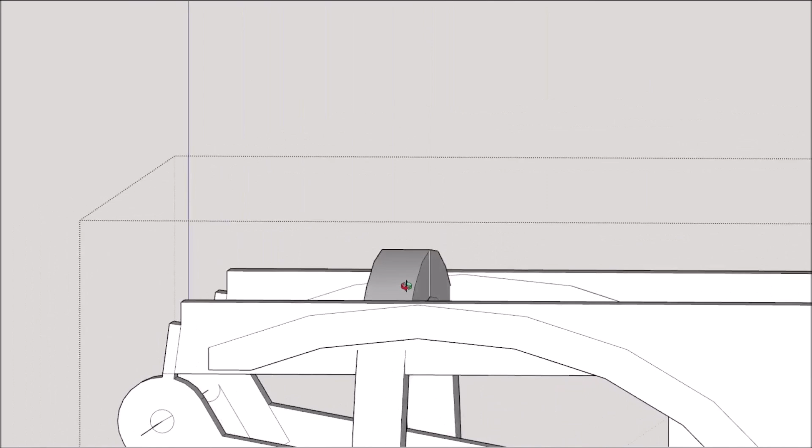Plus, I've been designing, as you see here. I did a screen capture of 5 hours of footage and got it edited down so y'all don't have to see all the studying part of the whole animatronic. But you'll understand that when you start designing your own. Eventually that's what I want y'all to be able to do, because it's just a special feeling when you design your own. It's just a good feeling.

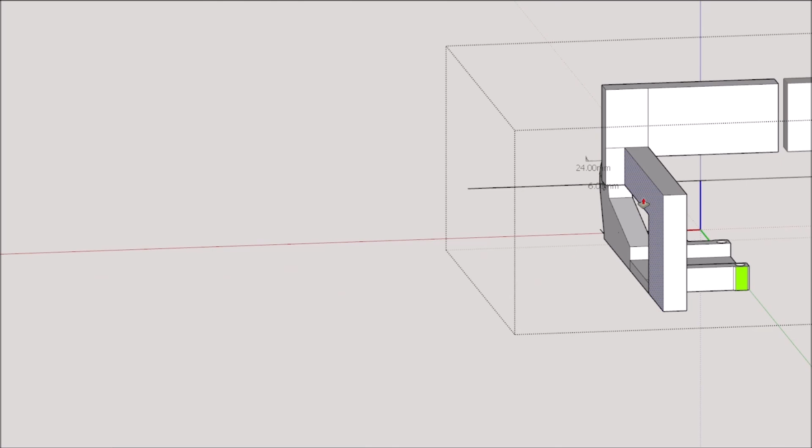What I'm doing here is the designing of the so-called brow mech. There are three servos that are going to be mounted to this so-called scaffold, I'm calling it now, because it kind of looks like it after you see it finished. It really turned out well. I go by the pre-existing shapes I had put these ribs on in the last video we've seen, and I'm going by that as far as height and length.

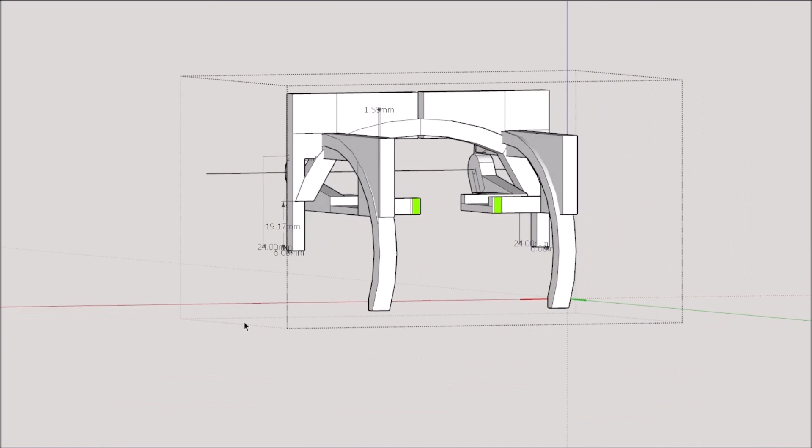I'm kind of doing a block version, not so rounded, because you'll see later I will put magnets for the skull to attach, and it needs to be a flat base. I also have screw points, and I've been making screw points today, but it's coming along. I have it all mixed together here just so I can see what I need to do with these blocks. I'm just trying to attach everything to this eye mech, or the blink mech part.

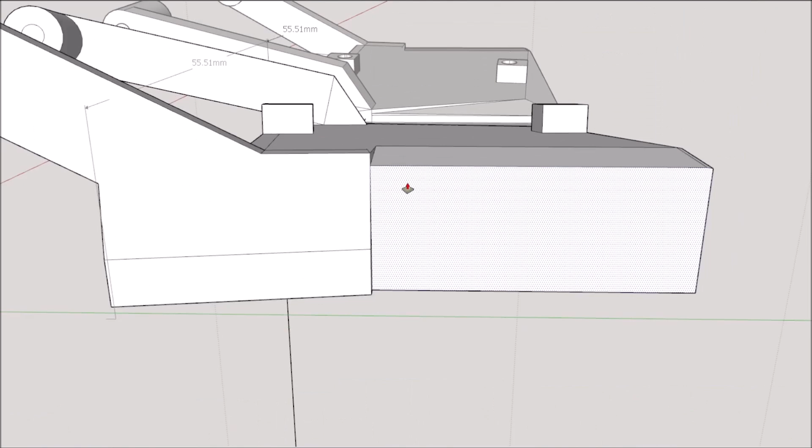So what I'm going to do is manipulate this part of the eye mech that I don't need, and this is where the servo lays. They call this intersect faces, and that's what I've been using here. I'll put a block there, highlight that one face, right click and say intersect with face, and it will know what's surrounding that face, then copy the new lines or vertices to that shape, so I can go in there and edit.

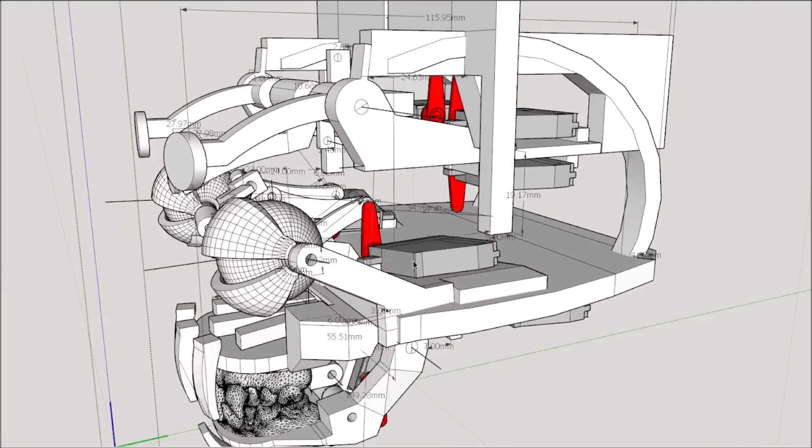Now, some of the complex shapes you have to seriously do some editing, but it works 95% of the time really well. A lot of these videos I have sped up, this is like time 6, because I've probably put in so far on this one project - I can get a pretty good calculation - probably close to 30 hours, if not more, into this animatronic here.

And it's the design thing. I mean, everything mechanical especially has to be designed. It can be kind of tedious when you're doing it with any kind of software, because you're looking at a three-dimensional object on a 2D monitor. So it gets kind of strange to do that. Plus, if it's the size of your monitor screen, you're thinking this thing's big, but yet it could be the size of your hand, and it can kind of throw you off.

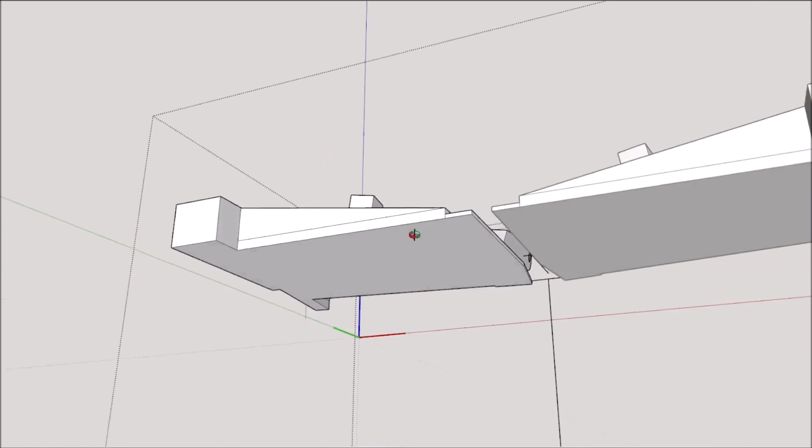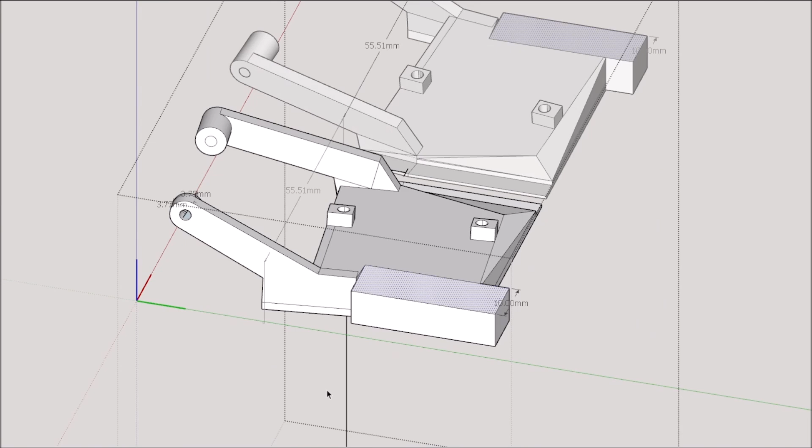I'm working on this blink mech part, trying to get a base for me to connect that so-called scaffold, the brow mech scaffold, to this area here, because I'm going to put screws in there. I determined this is where I want it fixed with some screws. I'll use 2 screws right here, but it's mirrored, so there'll be 2 other screws there, plus 2 on the back end ribs, which you'll see later. This is just me forming this little area to give the mech screw points.

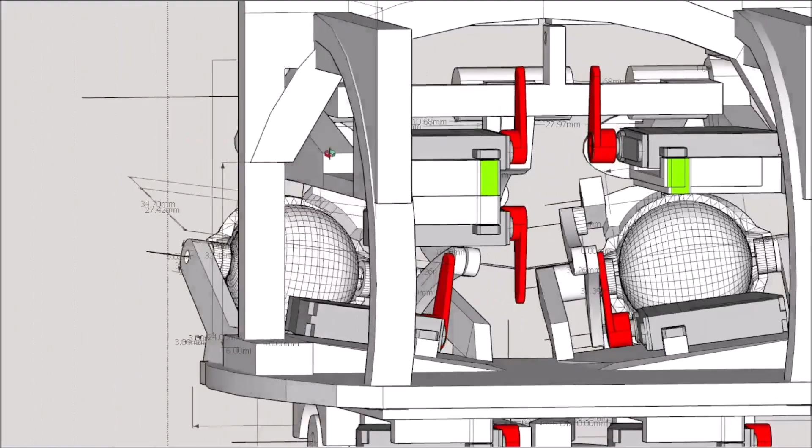Now you'll see me jump around. I'm working on a platform, and this platform is going to hold the so-called blink mech mechanism, with its servo sockets being its area. Then this scaffold is going to attach to it, and then you have the eyelids, then the beads, and so on. It's just making everything kind of modular.

Later in the design, you'll see the brow mech scaffold, and I'm probably going to print it in one piece. I've joined legs to the object, and I try to break it down into multiple smaller pieces, mainly so I don't have supports. This thing is a good size, as you'll see later. I'm not a big fan of supports, but sometimes you have to do it.

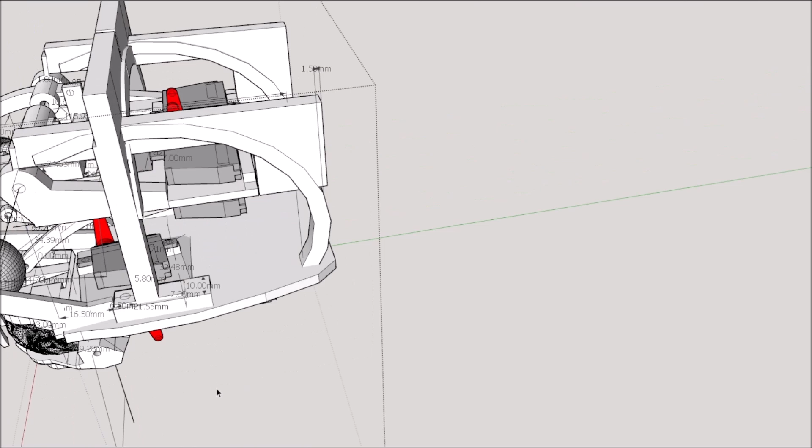But I'm trying to do fewer parts to print, so this would be one major part, because it holds the brow mechanism, holds 3 servos, and supports the skull lid itself. That's what I've been prepping for by designing this whole thing - this process where they're mirrored, and whatever I do on one is going to be copied to the other one.

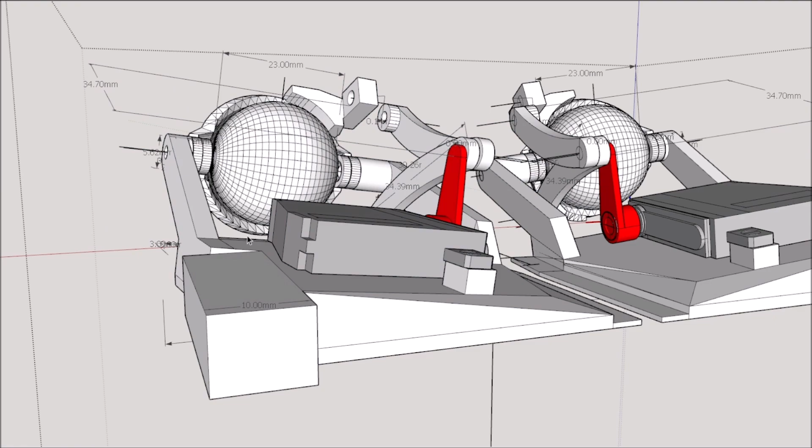So before I release the so-called component and make them non-mirrored, I can join it as one. But anything I do on one, I'm going to have to do on the other. So it's best to do all you can on one side while it's mirrored.

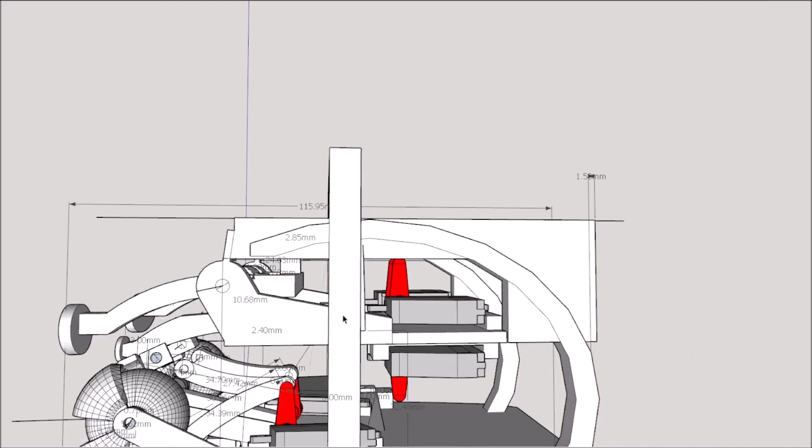Someone had a comment that I could reduce the polygons of my ZBrush design so it won't be such a large file, and would be able to put it inside SketchUp. I've done this a number of times, especially when working on the Hulk character, to get a size ratio of the skull I wanted to build. But ZBrush is primarily based on units, not metric. They do have a measurement thing, but it's nothing like a ruler.

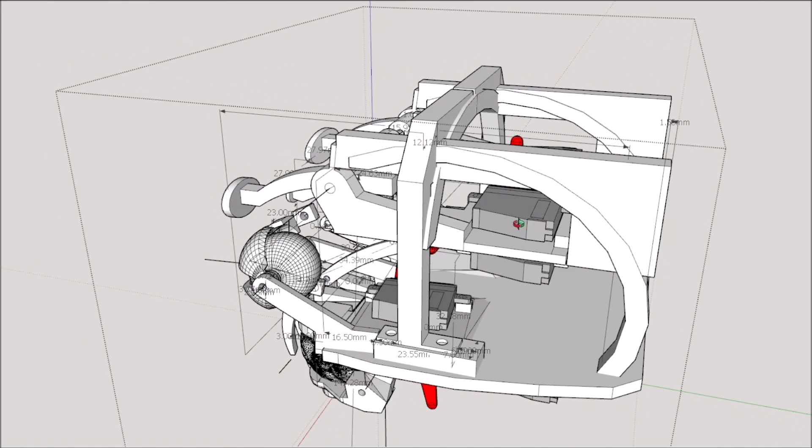ZBrush has Decimation Master, where you can reduce the polygons. If I have something that's 200 megs, which is a pretty good size file, I can turn it into just a couple of megs to put inside SketchUp. Like if I did the sculpture and put it on here, I've done it before, but my measurements are somewhat off. Even though it says a certain size, I'm not getting that same measurement - it's a little off.

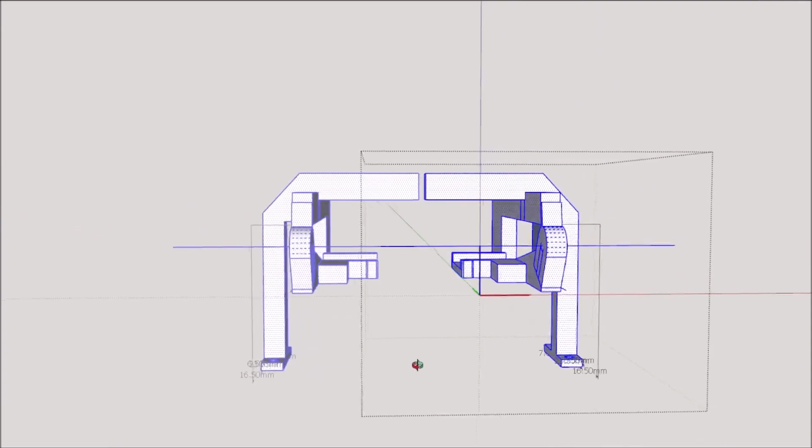I like ZBrush, don't get me wrong. It's just that it can't handle something large like my big Hulk creature - it's 17 inches from the chin to the top of the head, and it really doesn't like things that big. You have to reduce it and then re-enlarge it to the original size, I guess, but I think you're limited. I don't know everything about ZBrush - I'm no whiz at it at all, and it can do a lot I've not even touched the surface of. I'm just in there to sculpt monsters, basically skin for my creatures, just getting by. I try to use multiple tools, but it's only a few handfuls I really like to use.

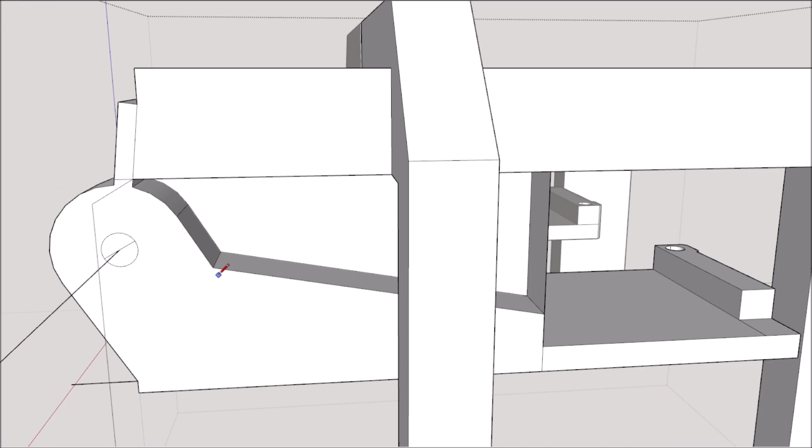As far as designing this brow mech, I'm kind of closing things up a little bit so I can remodel the shape. There's a certain shape I see in my head that I'd like to have, and it needs to have clearance through everything. Also, I need to be able to get my fingers into areas that might be small, or make sure that if I need to screw a nut in place, I can get to it.

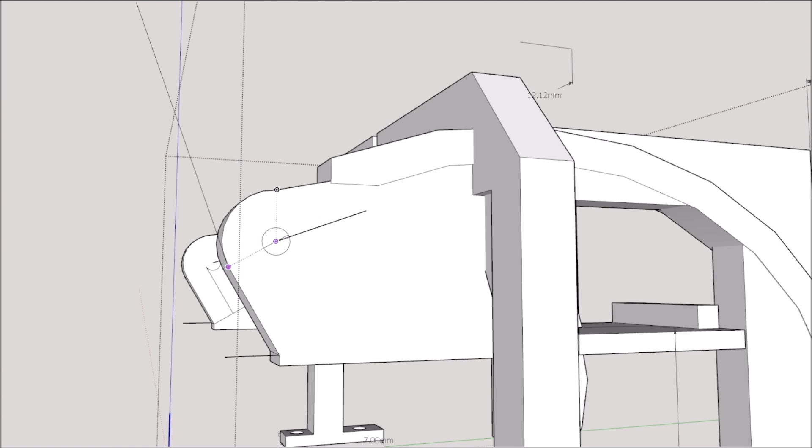For instance, with this whole rig, the scaffold I'm building here now, I'm going to have to put the servos on first and then lay this onto the skull itself or onto the main base.

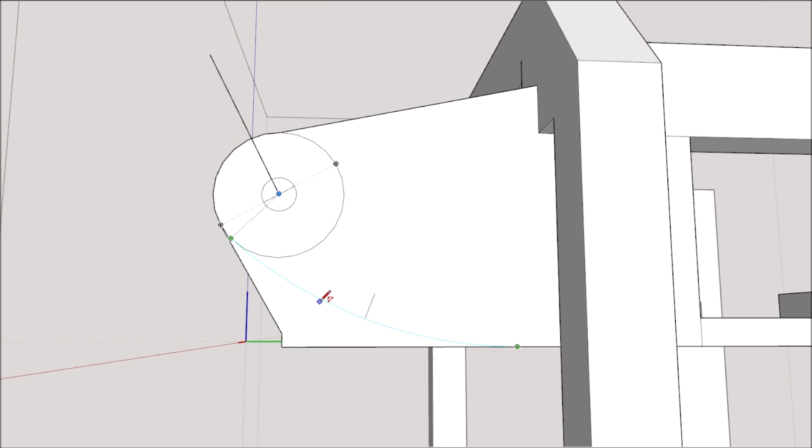And then I mean I can still manipulate it to a point, but there's other things you have to calculate. Even with some smaller animatronics, I had to put screwdriver holes into certain skull areas, so if I needed to adjust a screw I could do that. But when we're doing an animatronic with skin, as soon as you attach the skin, everything needs to be done. And anything mechanical is subject to failure. There's always that possibility of something failing, but we're just trying to avoid that.

That's when you put in the hours and days and weeks and months into something, that's what you're trying to avoid, having to fix something. So I'm trying to make this thing somewhat durable too.

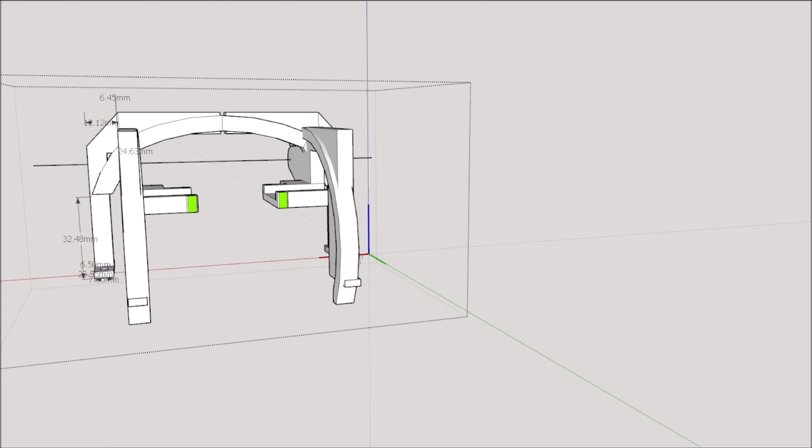There's other ways to print this, and I'd also like to see some of my things milled out of aluminum. I don't think the size of this scaffold... some of these things are 6, 7 millimeters thickness, but with metal I could reduce that by half if not more, and add threaded screw holes to bypass any kind of nut mechanism, so you wouldn't need a lock nut situation, and that would save even more space.

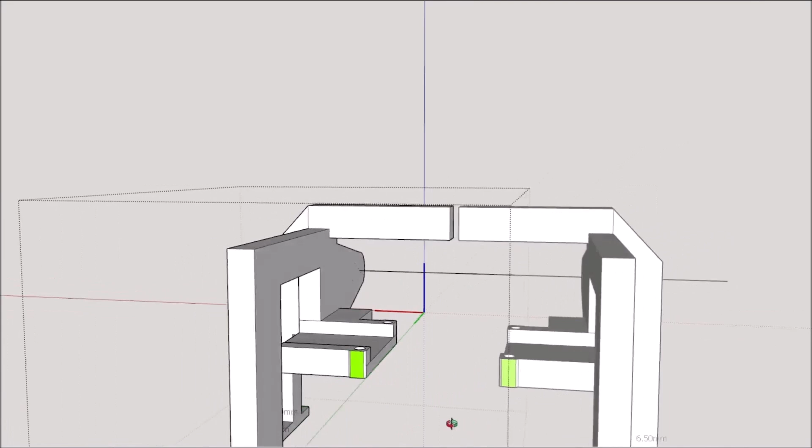And that's another thing about animatronics: it's all about space. You've got to have clearance for your linkages, and your linkages have to have clearance too, so they don't bump into something.

Then you have your wires coming from your servo, and they have leads you need to slide through holes, and they might have to travel through multiple floors to get to either a servo controller or some type of receiver. It's all part of the design.

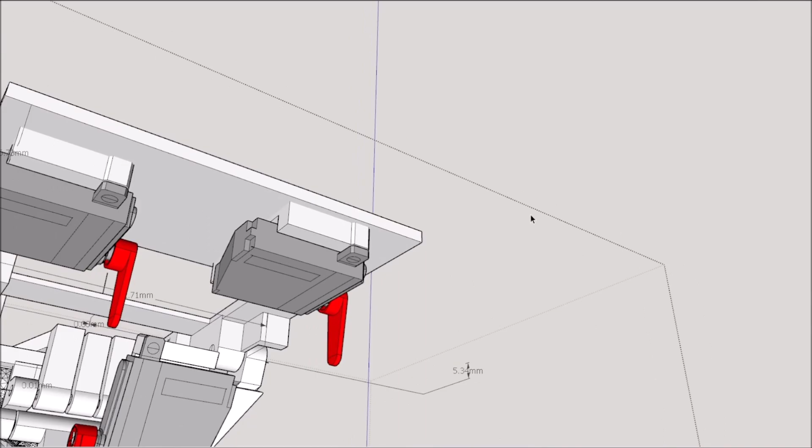But here, I'm working on the table, and this is a new table, but it's going to connect everything from the top up. The new brow, scalp, and then the eyelid neck, and all this has to be where I want screw points to connect all that stuff together.

Now the eye blink neck will be connected to that plate already, and then that will be one part. And then I'm wanting to get another... I'm making this plate thick enough so I can cut it flat right down the middle of this thick plate, and then I can print that one plate, and then print the so-called mouth neck plate, and that way I can just screw everything together, one time.

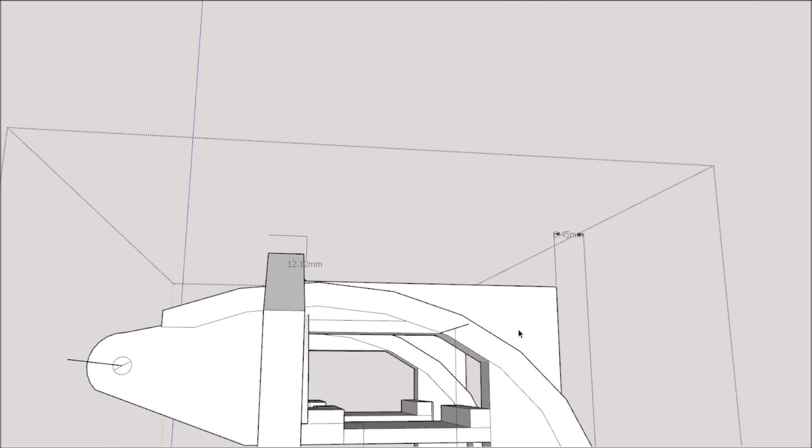I mean, it's going to have a lot of screws because you have to calculate the servos, the linkages, and then the whole prints that you have to screw in place. And there's going to be nuts and washers and things like that. Sometimes you try to eliminate a lot of that, but it makes it solid, and makes it strong and durable.

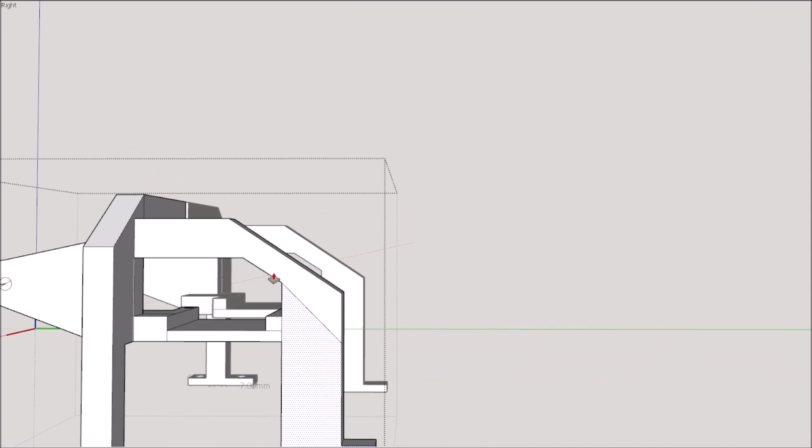And also on that main support plate, I'm going to have a gimbal, and that's going to be on the very back end of the skull itself. The main plate will also have a so-called border, and that border is going to be from what I build upon the skull. The skull border has a thickness, and that's the thickness of the shell skull part.

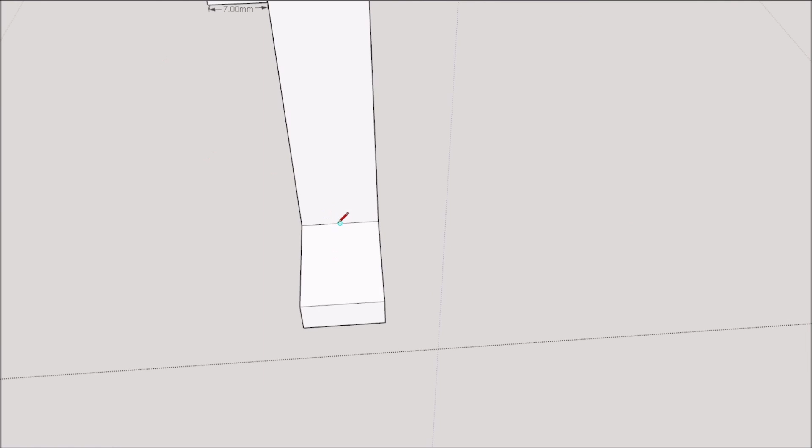And then you'll see here later on the scaffold where I'm adding these boxes, and I'll probably point it out to you in this video, where I'll have these neodymium magnets set, and they're going to have opposing magnets that are part of the skull, so the whole skull will just click into place and fit correctly.

But I design these things because everything is going to be covered with silicone, and there's going to be some places that need to be glued, the silicone to the so-called skull, and some stationary points to the skin where that part doesn't need to move. But I'm going to have some type of skull plates in certain areas just so I can stick glue or the silicone to the skull.

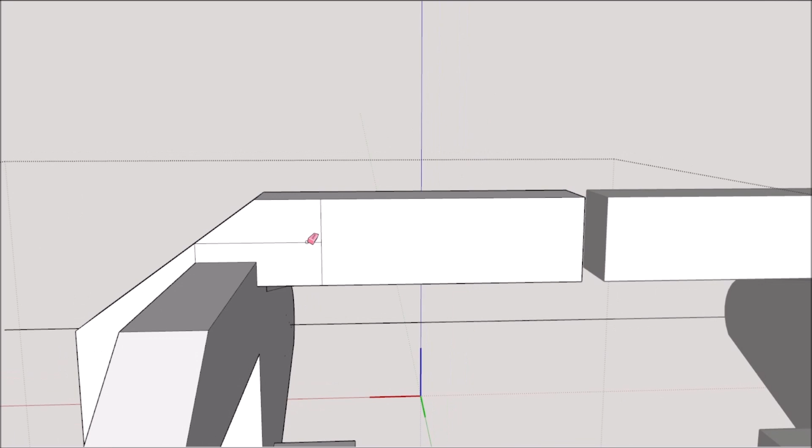It's just designing a whole cover system for the entire mech. Under the eyelids, there's going to be a skull part too, because I want something to be glued underneath those eyelids. I don't want the whole back of the eyelid to move, I just want the eyelids to move.

Yeah, I like designing all these things. It's pretty relaxing, but once again, there was 5 hours I recorded, and that's what I'm editing right now, and I edited it down.

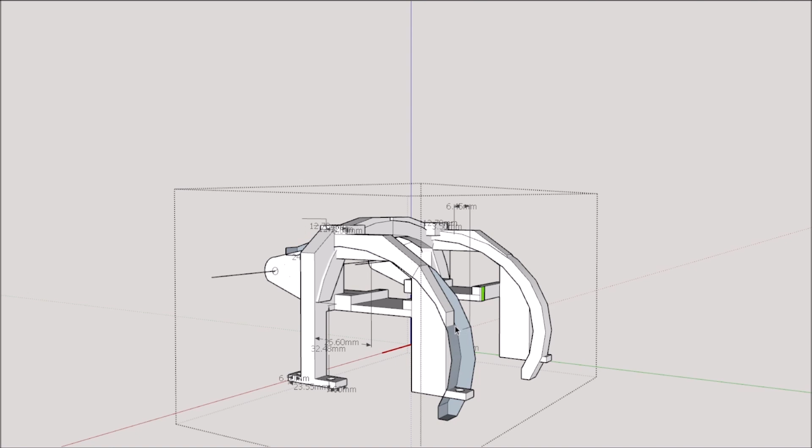It was 5 hours, and there's mess ups that I edit out, like the hourglass that comes when your computer freezes up when you're doing too much work. I have that all the time when I'm designing, and it'll freeze up for a minute, and I have to edit that out.

But then there's other things where there's no sense of me showing you that, because there's things I add to this design that I changed my mind on. I say, well, I'm not going to go that route. So I'll just edit that part out.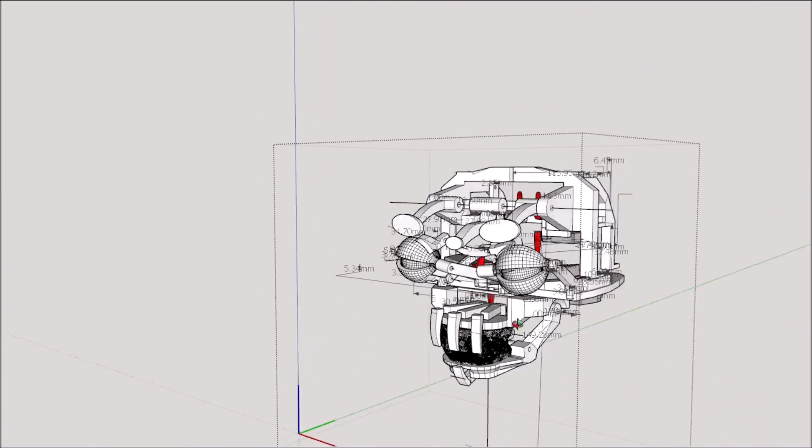I even did a smile mech to where the creature would smile or frown, to give more of a cheek movement. I could probably do it, but every movement needs another servo, and I'm trying to keep costs down. It's cost down for y'all guys too, because animatronics can get very, very expensive, and I'm trying to keep this low cost. I'm trying to do a really good multiple movement expression animatronic, lifelike, for little or nothing.

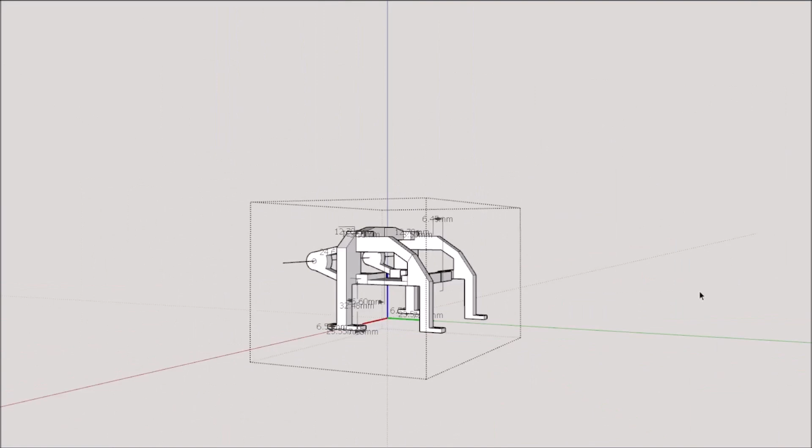So, y'all see on that little creature test I did, that so-called proof of concept. I've been wanting to do that for a while, but I was so busy doing Grogus. I got to the point where I just did a little test to prove it, and I've had this so-called theory for a good 10 years.

I knew the technology of 3D printing because you could see on my other YouTube channel that when I made the old school way of animatronics, I was making these little blocks out of polyurethane. I would pour it and then cut these blocks to make these so-called shapes. But now I'm doing the same thing with 3D printing, and that's eliminated that process.

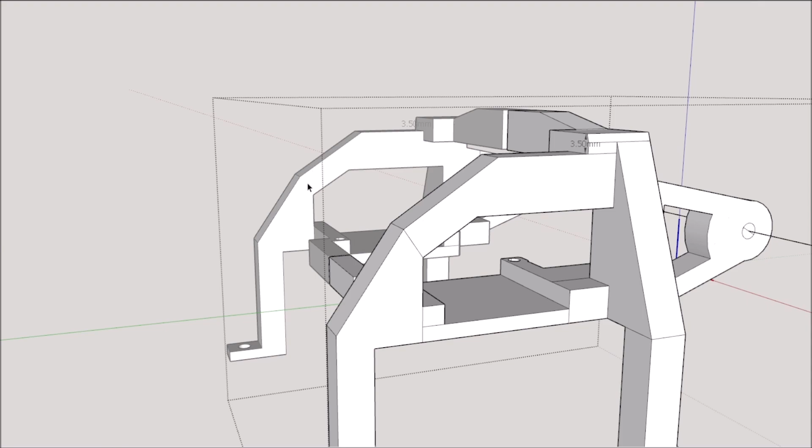So now I can do it this way. But it's like the old school way: you could do a sculpture, make a mold, then put a layer of clay inside the mold. When you did that and the mold is closed, you would have to pour another to make the core. When you demold and remove that clay, you have a core.

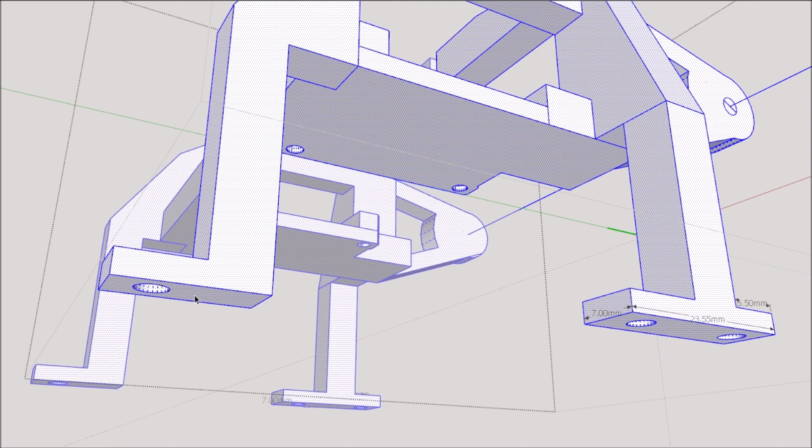But then you had to mold the core to make the skull. To make the skull, you'd either make another mold or do what they call a slush mold or rotational mold, where you build up a layer of solids with polyurethane and you'd have a shell. As soon as you sculpted, molded, and molded your core to make the skull, you're thinking, well, how many servos can I use?

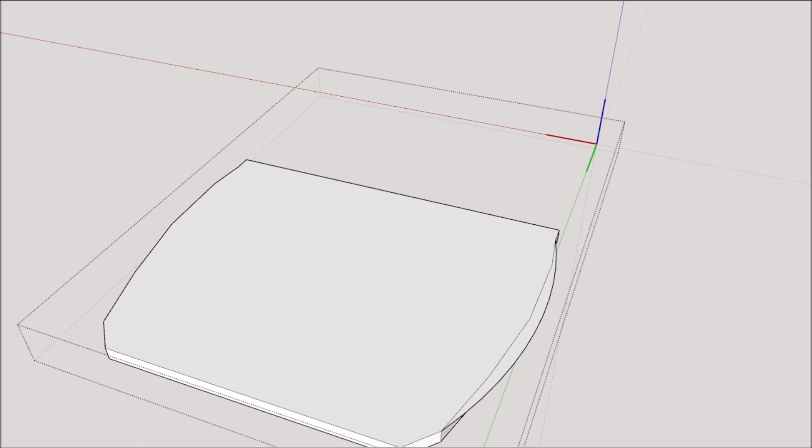Well, you really didn't know. You knew what you had to do, but you'd hope you'd have enough room. But by doing it this way, it's kind of reverse engineering, where you do your mechanics first, then you make your skull, and then you do your sculpture. There you go.

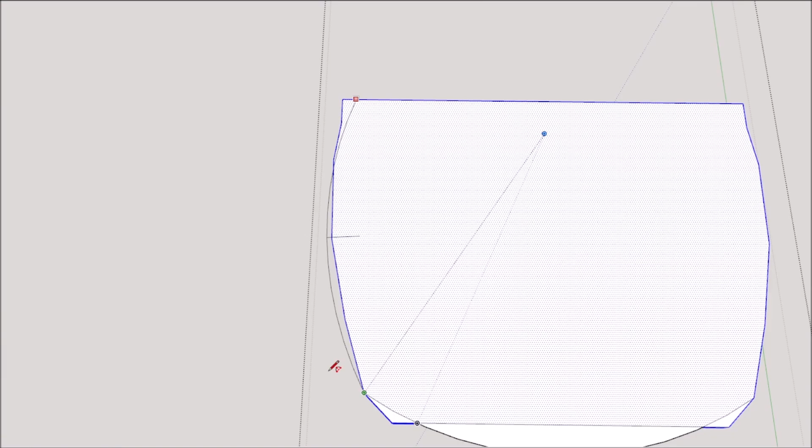You've done reverse engineering. But you can take it further - you can get your basic movements that you need. If you start designing a lot of animatronics, you'll develop a so-called library of parts. Then you can take these parts and use them, whether you're going to have a so-called alien or a creature that has more of a human look, a werewolf look, or a dinosaur look with a long muzzle of some sort.

You can change it - the eyelids are eyelids, so you can just enlarge them to any size you want. But like this plate right here, I'm trying to build up an area at the back because it's too short, and eventually you'll see me pull this back. I don't want it to interfere with that border with the skull.

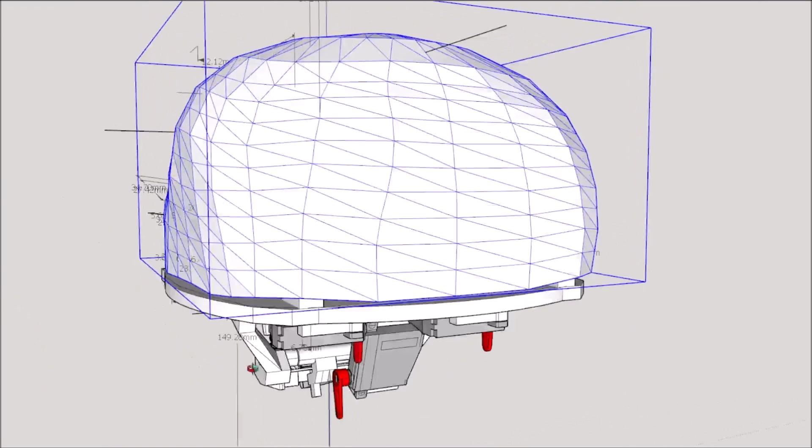That skull border has a measurement of like, I think, 3 millimeters or 3.5, and that gives the thickness of the skull. You'll see later on how I develop the skull - it's going to be the whole process of this. You'll see me put this skull on here, and this was from the last video, but you see how much space I have available here.

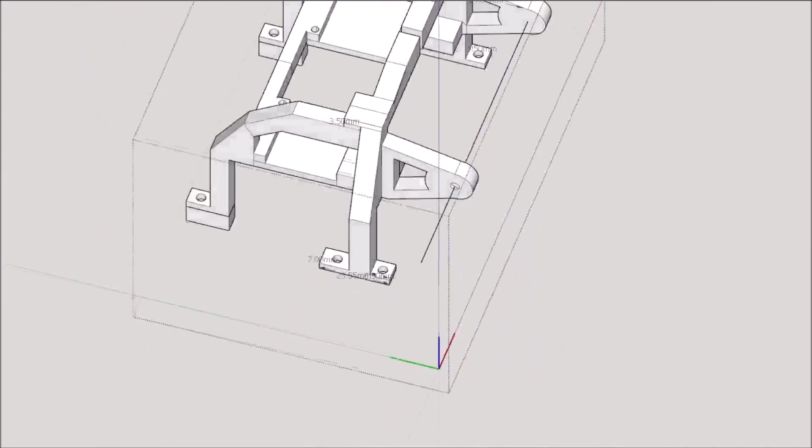I'll remodel this again to fit that border, which is already close by me just stretching it here, but I want it a little more precise. You'll see here I'm joining the scaffold together, and this little square right here is where the magnet's going to go. You'll have a mirrored magnet on the other side also, and on top of those, the opposing magnets, and those opposing magnet sockets are going to be attached to the skull. If you plan it and go by the borders, the whole skull will fit like a glove.

It's a wonderful feeling doing these things, and there's a lot of software and servo controller software. Some make things look robotic and some cheesy, and I like when I can have multiple movements going on at the same time. That's called mixing. I like that, and VSA is one of them, but once again, you're stuck on one software, and that's not what I prefer.

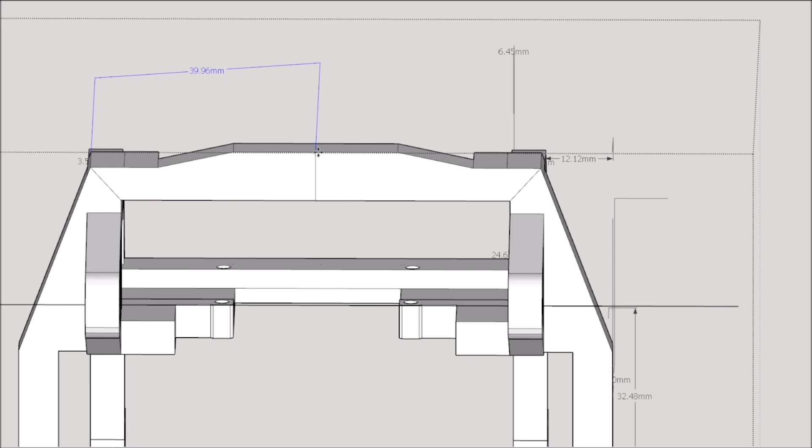I want y'all to be able to make that. You can say I made that. I want y'all to be able to design your own animatronic. Don't get me wrong, you have to put a lot of time in it, but you can start off small.

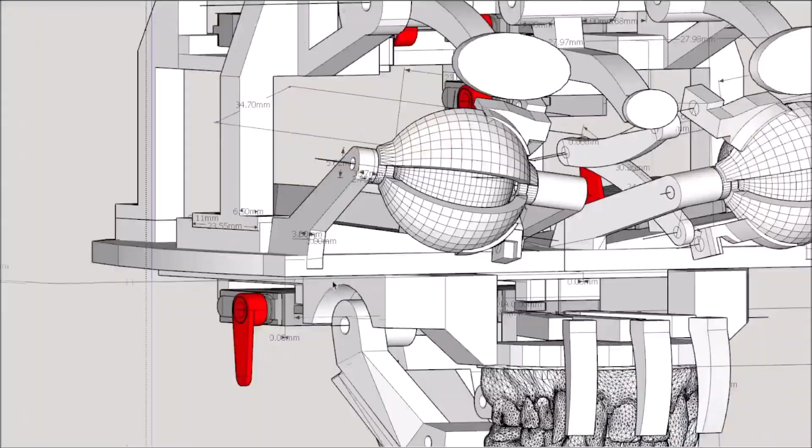You can do an eye mech, a blink mech first, and a lot of times you take an eyelid, or take some beads. You can take a bead, get the measurement, then make some eyelids, and get a servo to move those eyelids. Then you're going, wow, that's cool. Well now you can take that eyelid and mirror it and have two eyelids, and that's even cooler. Now you can enlarge it and get a larger bead and make a bigger one, or better yet, reduce the size and make something smaller. But then it goes on and on.

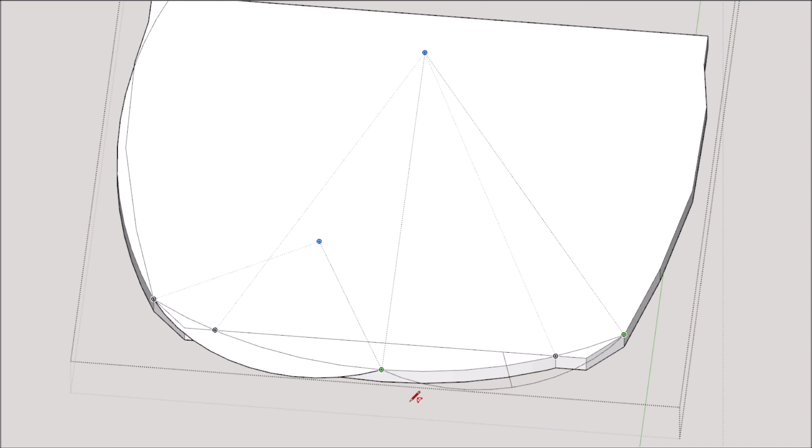You can have the same servos, and if you plan it right with the right servos, if you enlarge the screw points of a micro servo to a standard servo, you can make your animatronic that much bigger. Instead of something bigger than a softball, you can enlarge it to basketball size. But don't get me wrong, you still have to make some minor adjustments because most standard servos have 4 screw holes instead of just 2.

But that's nothing to it. Just copy, move up, copy, move down, and you have 4 screw holes. Another thing about designing is measurement. You're going to have measurements, and you check again, and then you double check. That's just something I've always been doing.

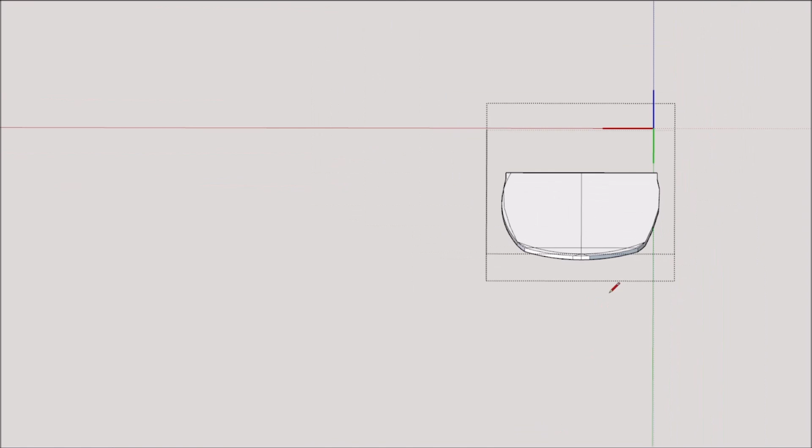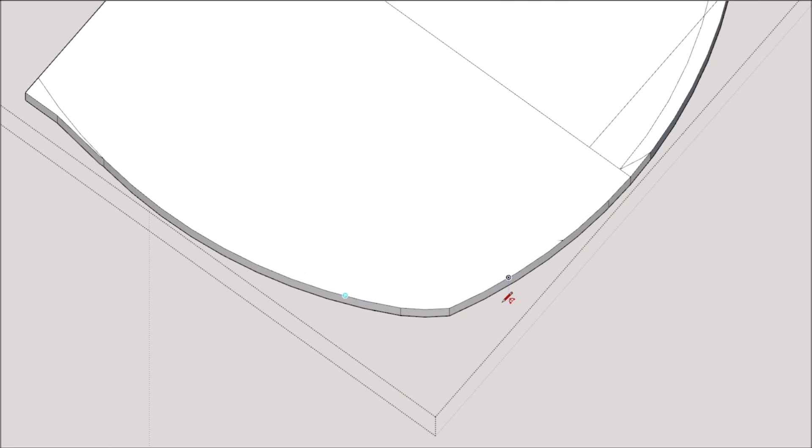A lot of times for these big animatronics, it's nothing for me to take this big Hulk creature here apart 15 times. It's not to fix something, it's to maybe adjust, or let me move this way to get this effect, or I've got to make sure it's fitting correctly. It could be a lot of things, or just to modularize everything - your eye mech, your mouth mech, your brow mech, your ear mech, your gimbal. You have all these things, and when you make all these so-called modular designs, you can put them all together and have a whole animatronic head.

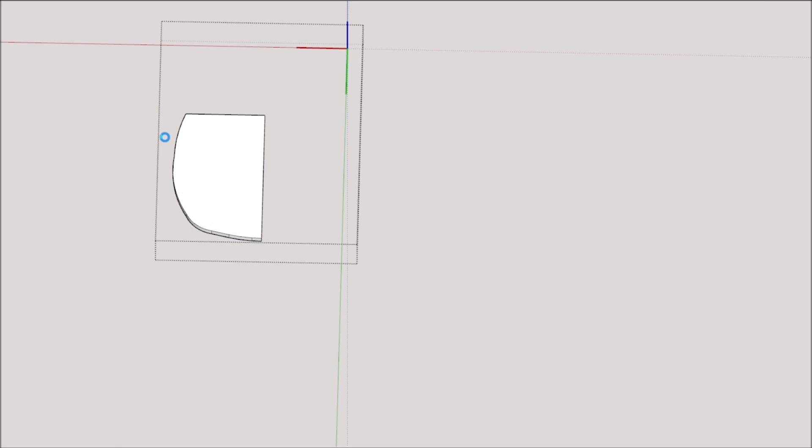When I start printing this animatronic, I'll film the whole process of me building it, and probably give an estimated time from start to finish, and it will probably take a few hours to put together. I mean, if you're just screwing in place 8 servos and then sliding all the parts into their places and screwing them down and stuff, you can pretty much build it.

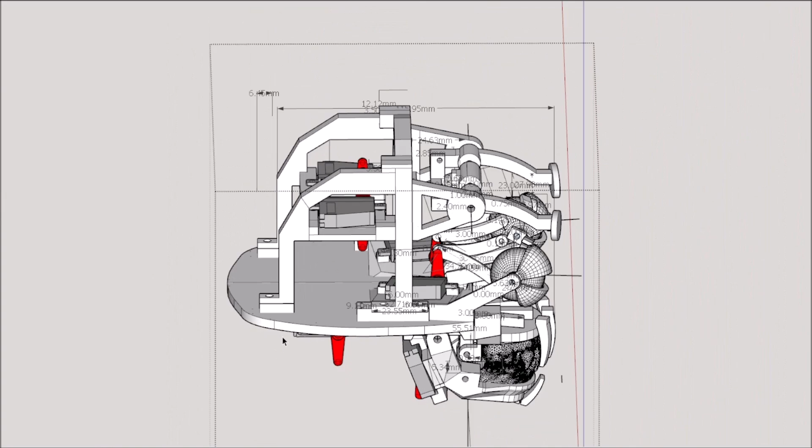As soon as that's done, you can connect it to a gimbal. After that part, you'll be able to set up a program with your radio. I always test everything that I do with an RC radio, and I've posted that in the comment page on the YouTube channel. You can find any radio you really like or prefer. It doesn't have to be expensive - some go up to $1,000 or more, or you can have a basic $50 one, or I've seen them as low as $30.

I would prefer you have more than 4 channels, but you're primarily going to be using 4 channels anyway. You'll have some finger dials that you can use, but mainly most people doing the so-called puppeteering are primarily just using the joysticks, and that's just 4 servos or 4 channels.

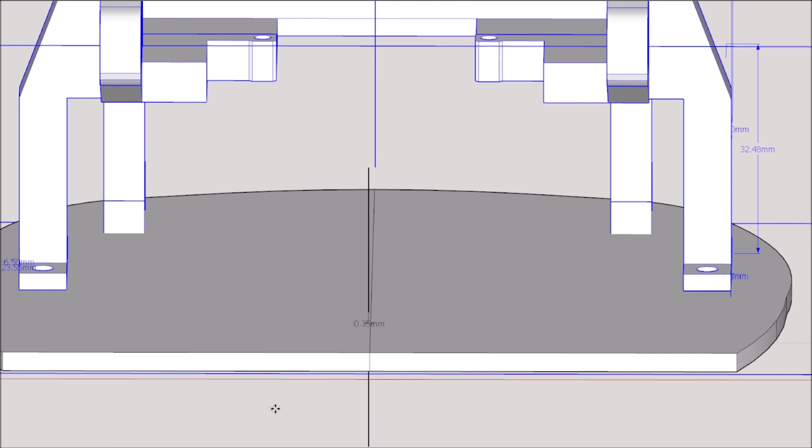That's a must to get when you're doing this, because you need to check your movement, or your center point of your servo. Right here on the video, you'll see me centering that to the plate. That's another key point that we have to make sure we do.

When you do this, find the center of the plate, and then I find the center of the scaffold. You see me here adding the so-called border that I was talking about for the skull. This is the border we're going to be using, but I don't need the center part, so I'm just adding these vertices to make a continuous loop all the way around, and I'll mirror that one side and put it in place.

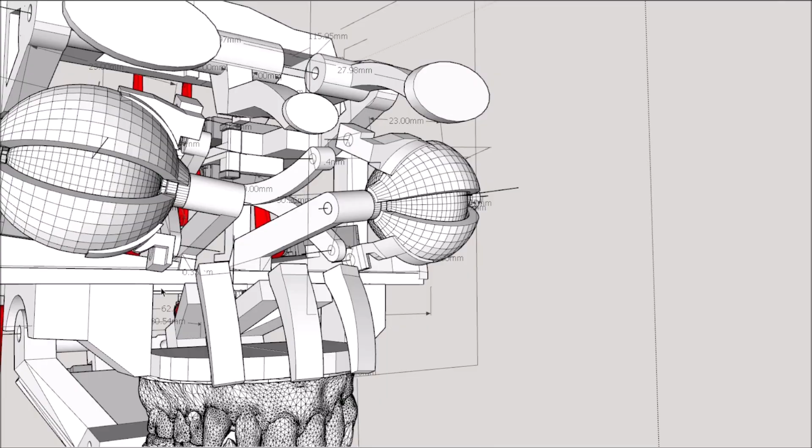Then on this, I raise the upper lip up, because I'm going to need some kind of shell cover for this mouth area, not knowing if I want the lips to go up inside of this, but I kind of want it to wrinkle the creature's nose, yet it still needs something there for the nose to lay upon, because you don't want it so baggy. If you don't have anything there, it will be baggy or have a raincoat effect, kind of a rubbery mask look. So it needs to lay upon a skull.

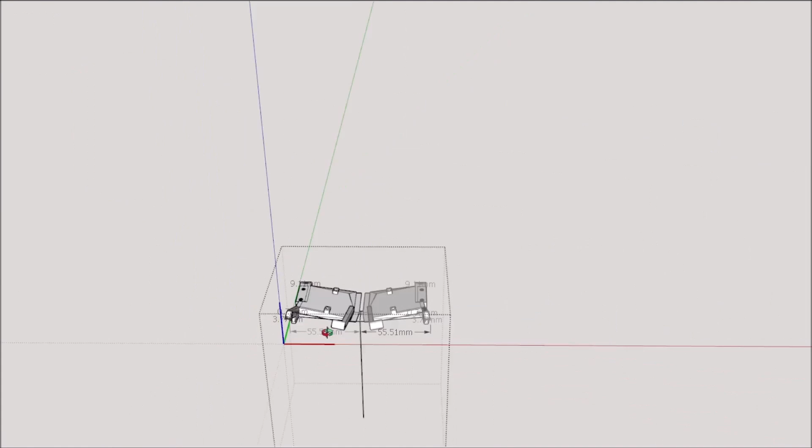Now here, what I'm doing is finding the center axis, or the center point to where these eyelids and this eyeball is. I'm going to make a circle, and cut that circle in half so I can give it some rotation to make the eyelid and eyeball mechanism, the hole in the skull part.

This is what's going to connect the skull, like the bridge of the eyelids, I guess you'd call it. That way this is where the hole going into the skull will be from. This is what it will become.

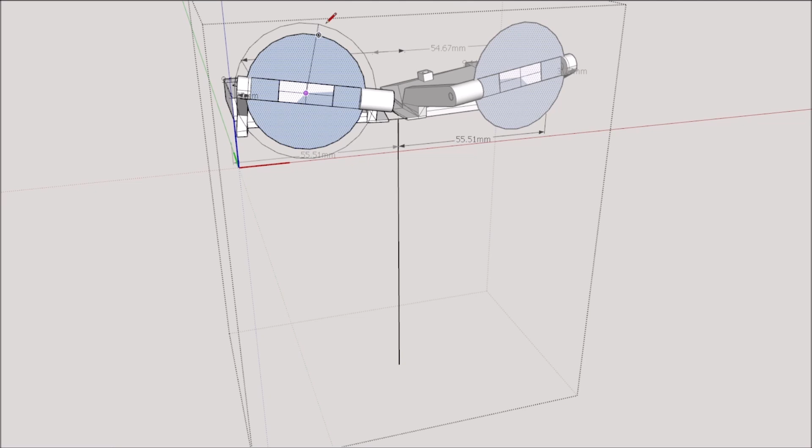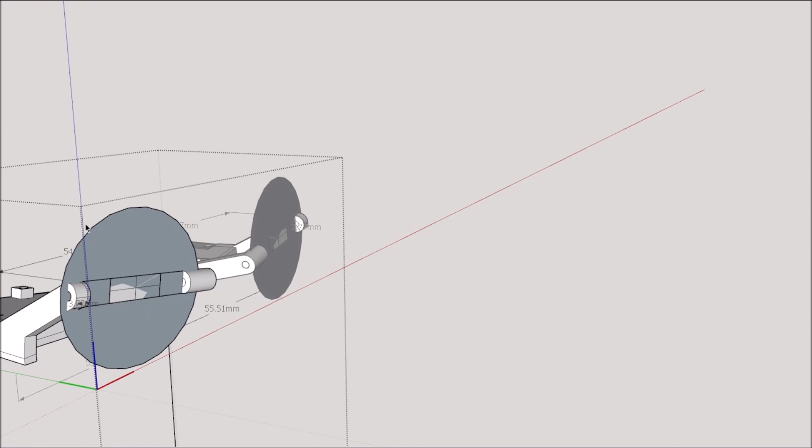This is something you'll notice: when you rotate the servos, the linkage point on the back of the eyelid sticks out somewhat, because when the servo linkages are pushing the eyelids, that linkage socket is visible. I don't want it to bump into the skull, so I have to close the eyelid so I can design around it, that way I don't have any interference.

Don't get me wrong, I've had that problem before, but now I've learned from that mistake, and I always try to correct it so I don't have to go through that again. Because you don't want to print something for 12, 20 hours and have to reprint or redesign it. So it's best to try your best to eliminate all that, even if it takes you a couple of days of redesigning rather than designing it right the first time. But it's just part of it.

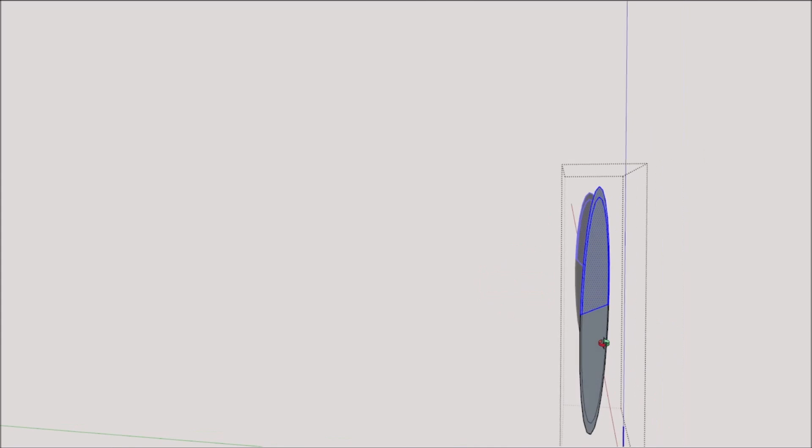This is the thing about SketchUp that's kind of hard to do: it all depends on what view you're in, but also when you're rotating at an angle and not rotating on an axis, you have to have a so-called flat base, or it will not rotate correctly. That's what I'm having to add here, where I can change my axis according to the flatness of that plane.

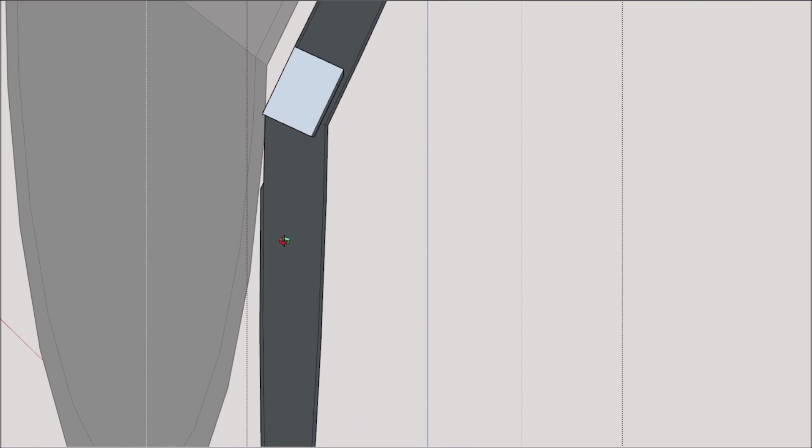But it's just part of it once again. I've worked on the main floor plate, worked on the eyelid socket area for screw points to do the scaffold that is the brow mech, and I have the border for the skull. Now I have the so-called socket areas for the eyes for the skull, and I'm getting close to doing the skull, and then I've got to do the underskull also.

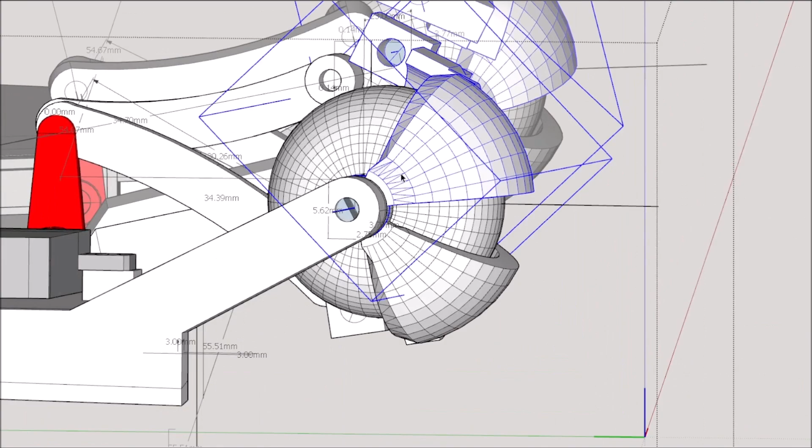That way I can have that form placed on there to print when I print the bottom plate. I want the bottom plate to already have that on there, making sure I can do that when I print it. It might also be where the mouth mech area has the cut part of that bottom skull plate too. But then I've got to redesign the teeth, and after I redesign the teeth, I can finish out the so-called lips.

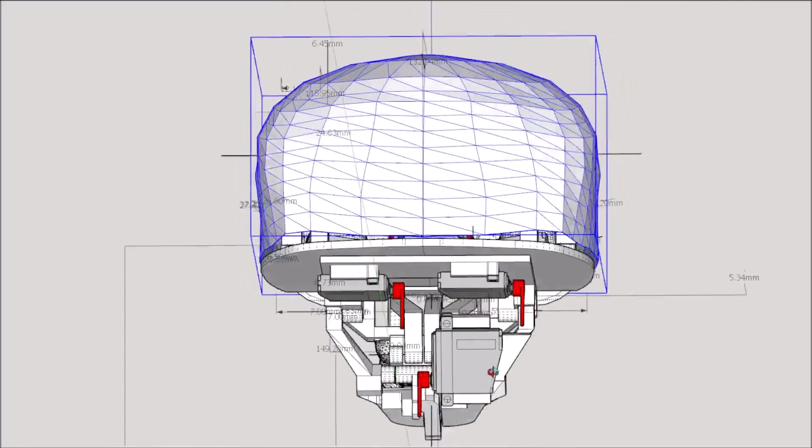But lip pieces and hinges, the little small parts like that, I can make adjustments. I can finish them and do the best I can, but they don't take long to print at all. As you see here, I'm checking all my measurements.

Now I'm going to have to readjust, I just figured this out earlier when I was editing, that I'm going to have to readjust the so-called scaffold, the bases where the screw points are. I'm going to have to redesign it so that it prints flat. I'd rather print it laying flat on a plane like so, but those legs need to be even, so I'm going to have to reduce the height of the back ones to match.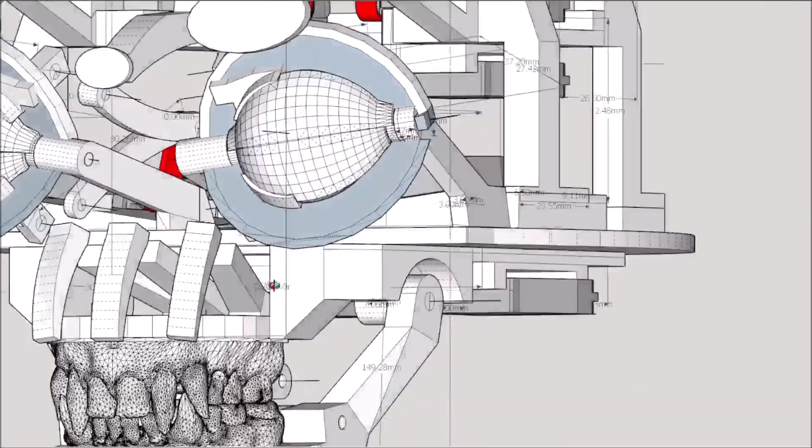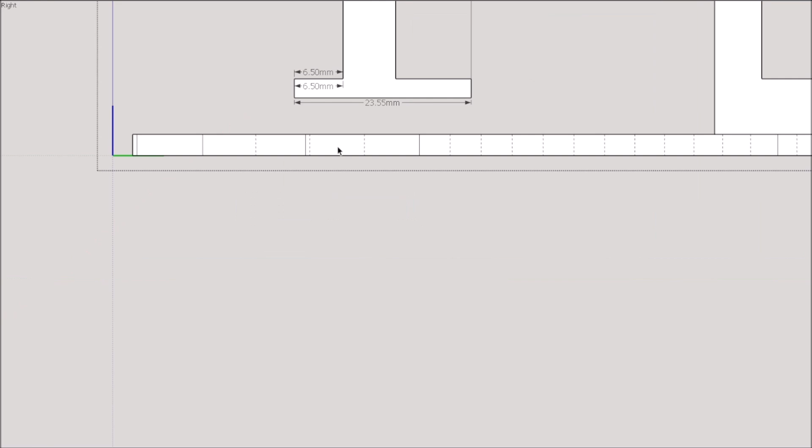But I look at having some kind of income so I can invest in research, like in servos. I study servos really, and it's a process I go through, I like a servo to be a certain type. I try to do a good review on servos, and other things also, like certain hardware or software or components, servo controllers. I love a good servo, and if it's good, I'll use it. But if it works hard, it's quiet, has good torque, and it's a great servo, but if it costs $200 a servo, I really don't have a need for it at this time in my life. Because if I need 20 of them, I can't afford that.

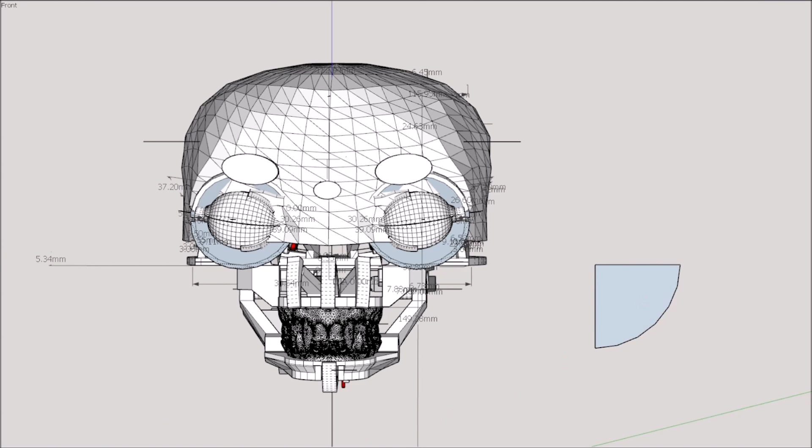And there's servos out there that are that expensive, I can't afford that. I'm in the $20 range, if that. If even $20 is kind of high. But I'm not into the $100 servos. I mean, it might be a name brand, but I'm trying to achieve this quality.

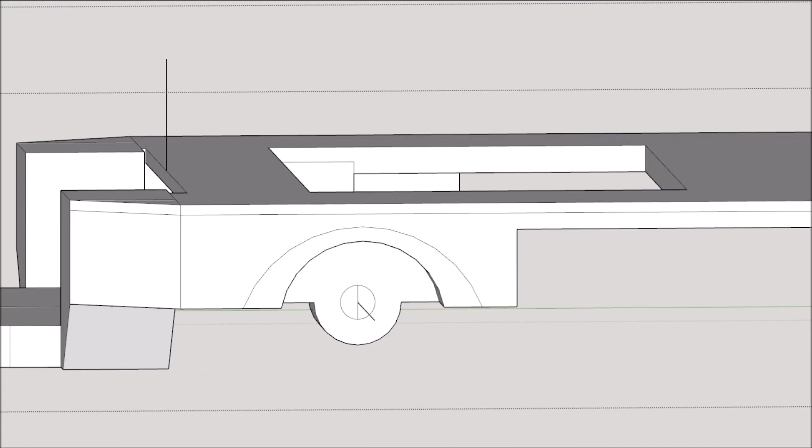I mean, those servos in that little small creature test, there were, let's see, two, three, four, five servos. Those servos were less than $20, and I got that achievement of movement with that silicone. Now silicone's expensive too, but that's just what you have to do. That's why I'm doing the size that we're doing here, to make it affordable, because we're going to have to mold this. It's smaller than a dollar bill, but still a size bigger than a baseball. You're all going to love it when it's done.

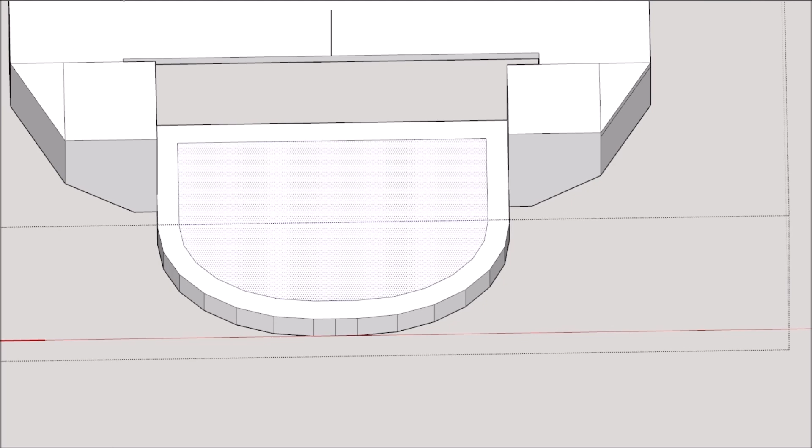But I rattle on about animatronics because it's just an obsession I have. I've been doing it for a long time, researching it, and it's part of the passion.

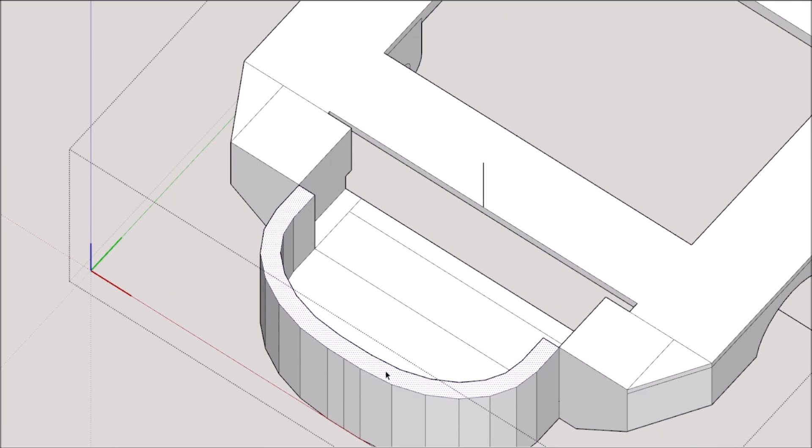But once again, this is probably one of the longest videos, I believe. I'm not quite sure, I have to double check. But this whole video is 44 minutes long, and it was from a 5 hour recording session last night of this whole process y'all see here. It's just a breakdown of everything I've done throughout that 5 hour period. It's great, I'm loving it, and everything's coming together.